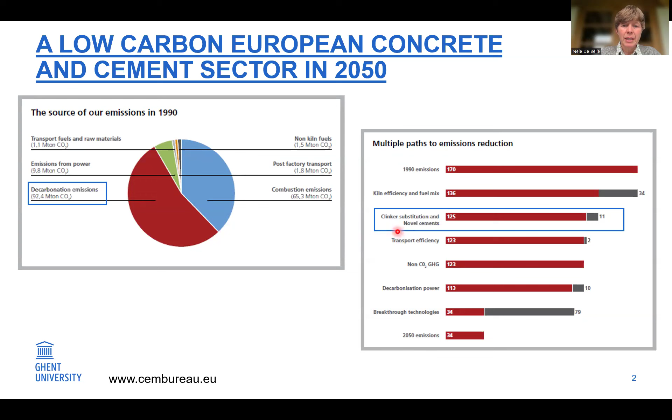In many regions worldwide, severe efforts are made to combat global warming. Since the production of cement contributes to around 8% of the global CO2 emissions, the concrete and cement sector have set goals to lower the carbon footprint.

Since the emissions are largely related to the decomposition of calcium carbonate in the clinker kilns, the use of supplementary cementitious materials to replace part of the Portland clinker can be an important part of the solution. The use of SCMs often contributes to pore refinement at later ages and can result in improved durability of concrete in several aggressive environments. However, in carbonation-prone environments, we have to consider that the carbonation rate is increased due to the reduced amount of Portlandite that could act as a buffer against CO2 penetration.

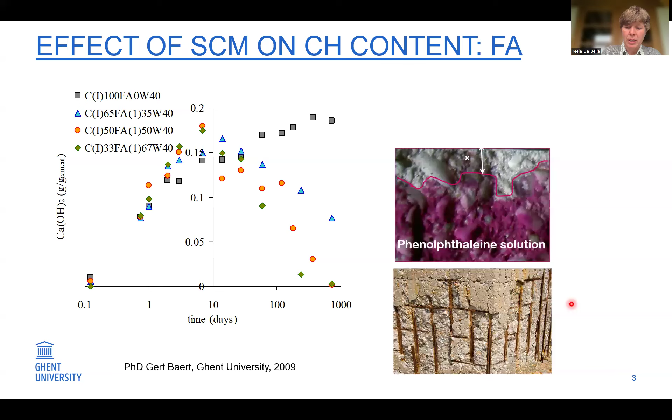In our previous research, we have shown that, for instance, in mixes with increasing amount of fly ash from 0 to 67% of the binder content, at early ages, there might be an increased amount of Portlandite production due to the stimulating effect on the clinker reaction. But after about 2 weeks, the pozzolanic reaction kicks in, and after more than a year, the Portlandite content can go down to 0. Hence, there can be an increased risk of reinforcement corrosion induced by carbonation.

Therefore, within the RILEM Technical Committee CCC, we have formed 6 working groups to study various aspects of carbonation of concrete with SCMs. The first 2 working groups have focused on the carbonation mechanisms, and the first thing we did was to compile an extensive literature review, elucidating the effect of SCM characteristics, exposure environments, and curing conditions on carbonation.

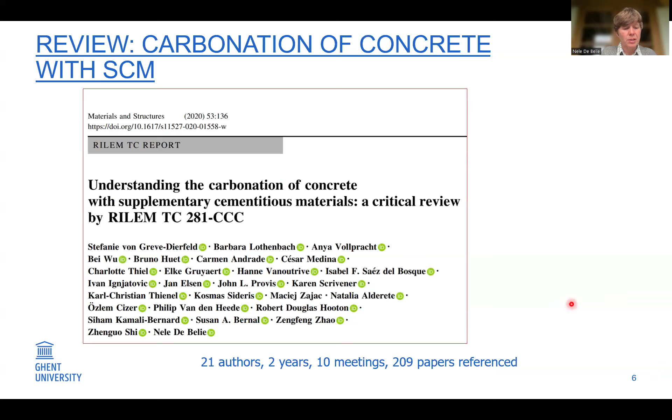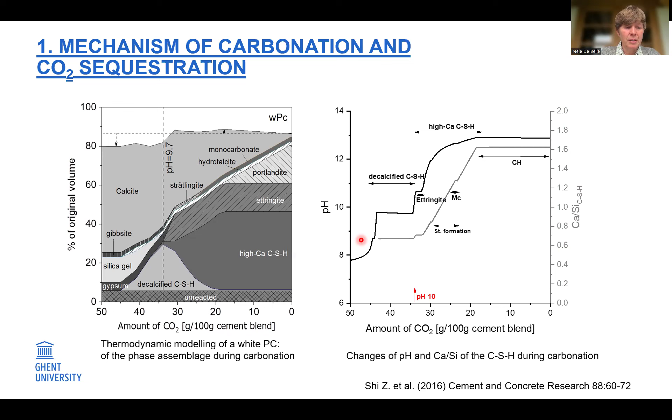The same carbonation sequence is observed in Portland cements blended with different types of SCMs. However, with the reduced content of Portlandite, carbonation more rapidly affects the CSH and the C-A-S-H phases, and this contributes to a coarsening of the pore structure, whereas in normal Portland cement paste, rather a pore consolidation of smaller pore structure is created. We can also see that in reality, the Portlandite carbonation may be incomplete due to covering by calcium carbonate crystals, slowing down the further carbonation reactions.

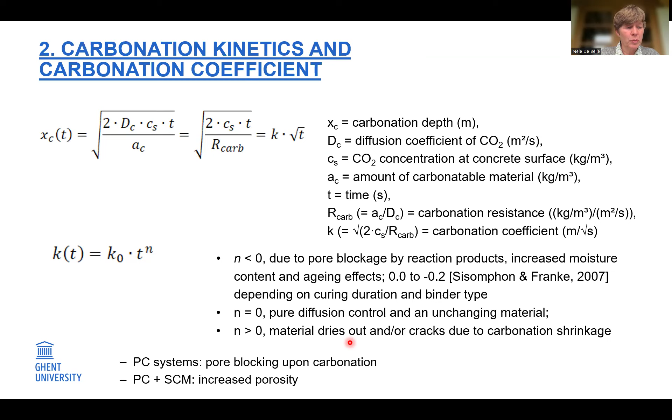Now, as the carbonation reaction proceeds with the square root of time, the first equation here assumes a steady state condition. However, if carbonation reaction products block the pores, and because of continuing hydration, the carbonation coefficient K could actually decrease with time. In the second equation, you would have a negative exponent N. On the other hand, N could be positive when the material is drying out or it cracks due to carbonation shrinkage, and that is often what we see in the case of concrete with supplementary cementitious materials.

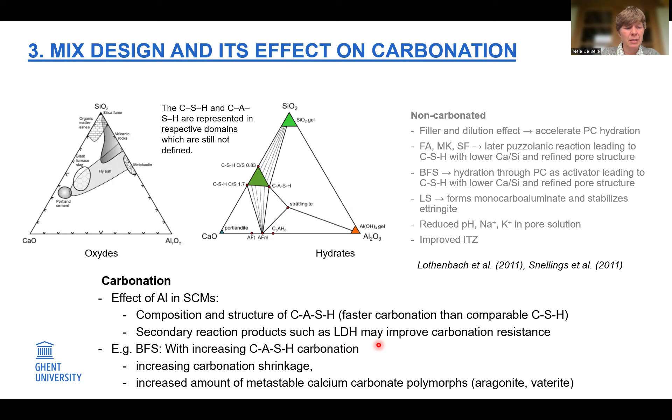Also, we see that the percentage of the calcium carbonate that is present as calcite is reduced, while we have an increased amount of the metastable aragonite and vaterite, and this might lead to a higher permeability. But on the other hand, there could be secondary reaction products, such as layer double hydroxides, which may improve carbonation resistance. But their effect is not yet fully understood.

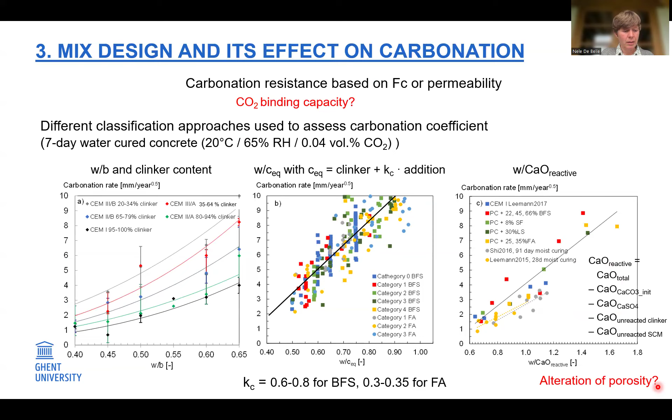Some other important factors: curing is of course very important to limit carbonation. We also know that carbonation proceeds fastest at intermediate relative humidity levels, but it's not very clear if the range is the same for concrete with SCMs as for ordinary Portland cement concrete. And higher temperatures generally accelerate carbonation as the chemical reactions and diffusion occur faster.

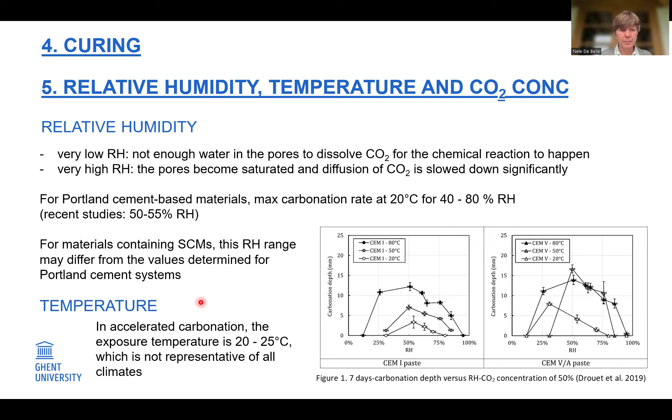What about CO2 concentration? Increasing this concentration is a common approach to accelerate carbonation for testing. From a thermodynamic viewpoint, it should not change the phase formation at all, but there are various side effects, as mentioned here.

For instance, more than 10% CO2 would lead to an incomplete reaction of the Portlandite due to fast calcite precipitation at the surface. Also, CSH carbonation rate increases with CO2 concentration, so there would be more calcium carbonate formed from CSH versus Portlandite.

So you have a change in proportions, and also the polymorphs found may be different at higher CO2 concentrations. Also, at higher CO2 levels, the release of water during the carbonation reaction will go faster.

This water in the pores can slow down further carbonation. So normally the increase in carbonation coefficient with the carbon dioxide level is lower than expected from the square root law that we would normally theoretically apply.

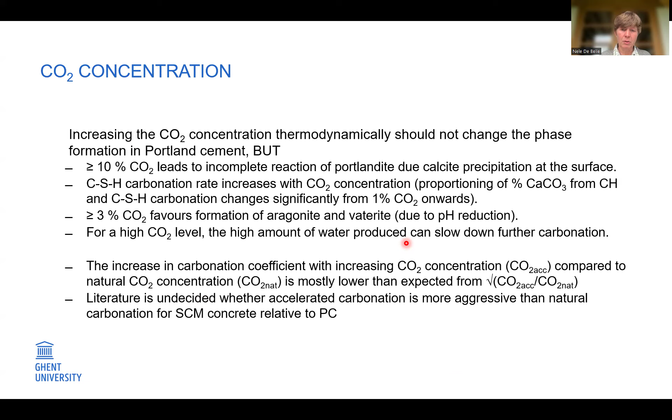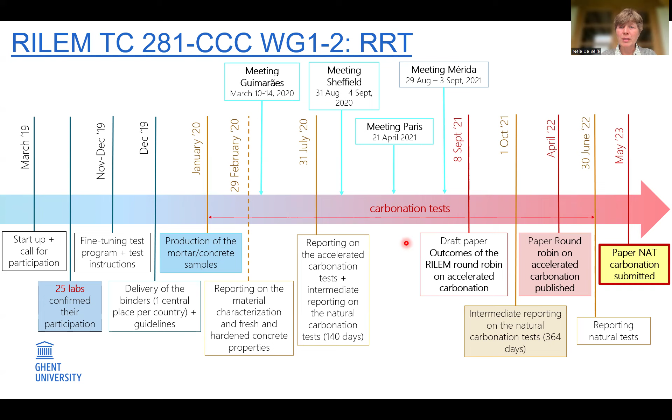So to obtain further insights into all these processes of carbonation of concrete with SCMs, we have conducted an extensive interlab test, which took us about 4 years, with 25 participating laboratories.

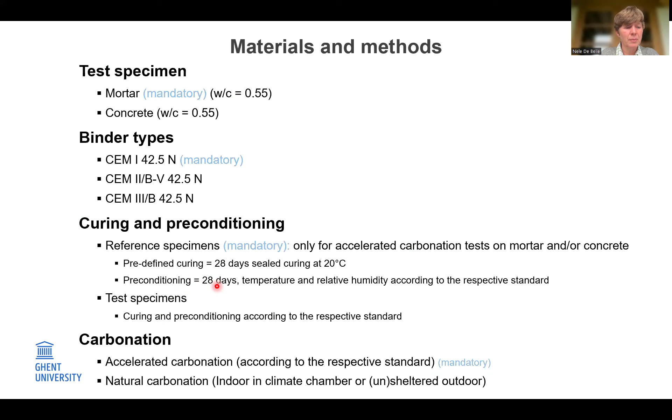We compared carbonation of mortar and concrete with the 3 common cement types, CEM1, CEM2, CEM3, both in accelerated and natural carbonation conditions. The specimens were either sealed cured for 28 days and then preconditioned in the same conditions as in the selected standard, or completely tested according to one of the selected standards. We compared 9 different standards, as you can see in this table, with specific curing, preconditioning, and carbonation exposure conditions.

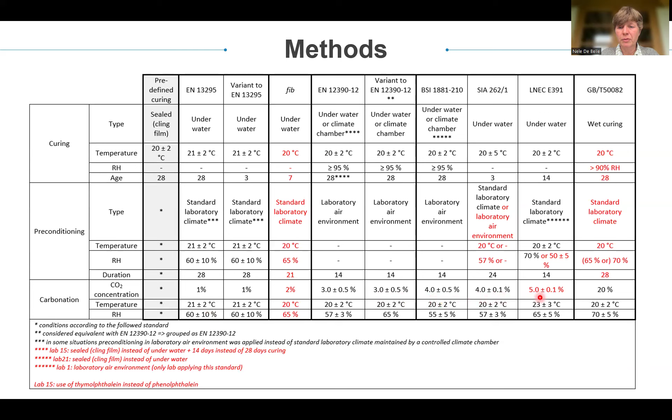For instance, for the percentage of carbon dioxide, it varies between 1%, 2, 3, 4, 5%, up to 20%. The mix design and curing conditions were such that the mortars or concrete samples were all of similar strength and consistency, independent of the cement type.

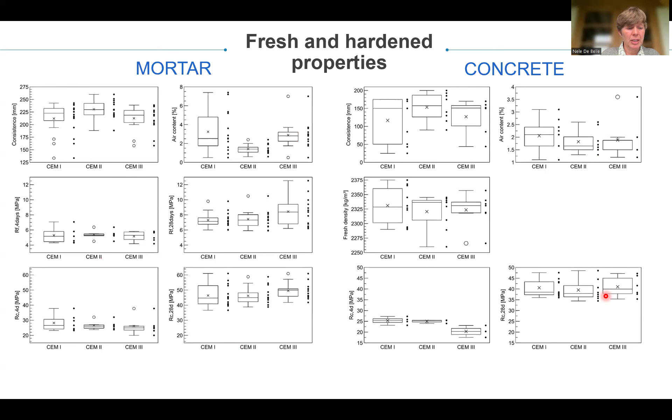The results showed, fortunately, that the different standards for accelerated carbonation were mostly able to rank the 3 cement types in the same order: the slowest carbonation for CEM1, followed by CEM2, and then CEM3 had the highest carbonation rate.

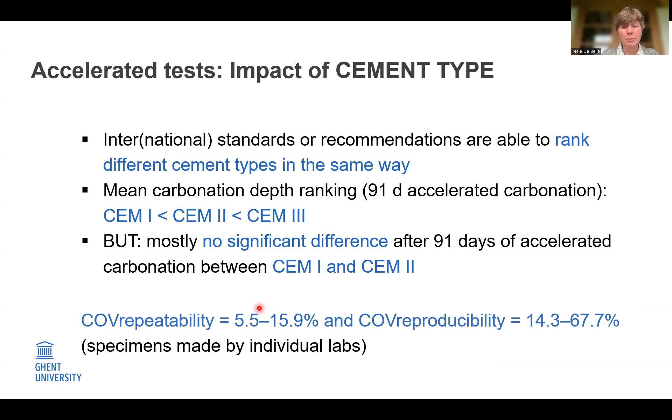Nevertheless, the coefficients of variation for repeatability and reproducibility, in labs and between labs, were quite high.

We also tested under natural carbonation conditions, and we obtained more or less the same order for carbonation of the different cement types, both for indoor and sheltered outdoor conditions, and both for mortar and concrete. When we looked at calculation of carbonation rates, it seemed essential for natural conditions that the exposure period was at least 1 year to reach a constant carbonation rate.

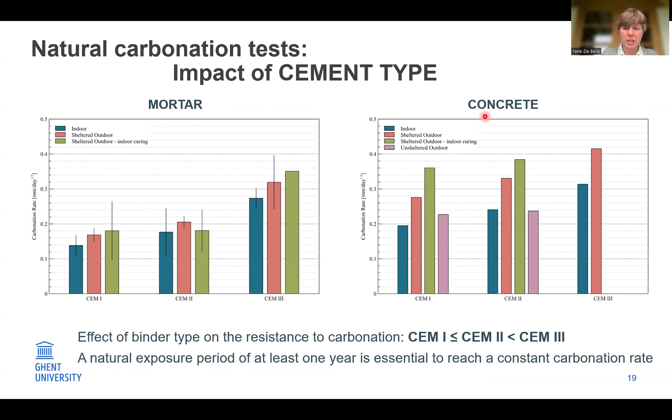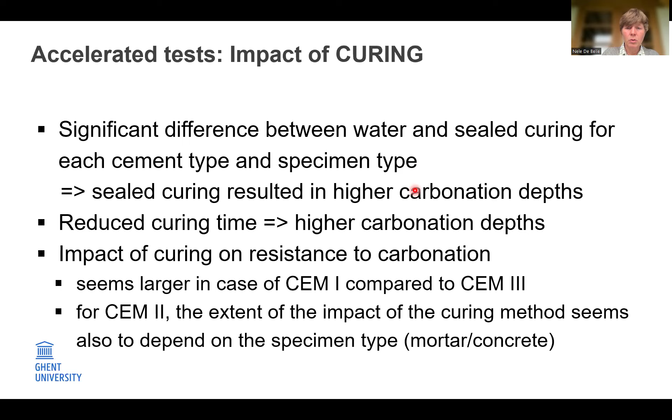Regarding the impact of curing, we found a significant difference between water and sealed curing, with sealed curing resulting in higher carbonation depths, and as expected, a reduced curing time resulted in higher carbonation depths. Unexpectedly, the impact of curing on resistance to carbonation seemed larger in the case of CEM1 compared to CEM3.

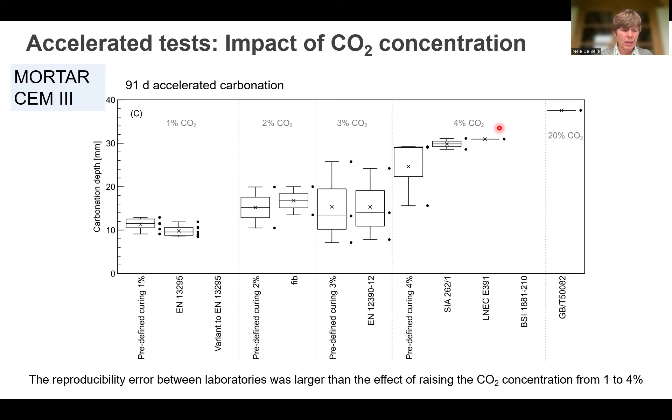In these results of accelerated testing, you can see a trend that the carbonation depth increases with increasing carbon dioxide concentration. But actually, the reproducibility error between the labs was so large that this effect was not significant.

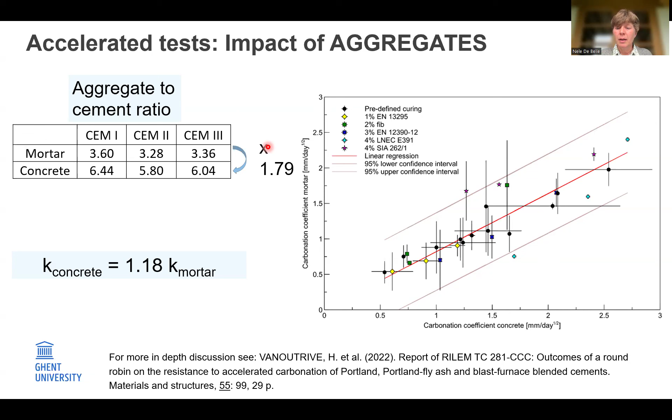We have also compared the carbonation rate of mortar and concrete. The carbonation coefficient of concrete was 1.18 times that of mortar, with the aggregate-to-cement factor being about 1.8 times higher for concrete than for mortar. In a natural carbonation test, the same factor was obtained.

We then also tried to correlate accelerated with natural carbonation conditions. Theoretically, if you look at the square root of concentration relationship with natural carbonation CO2 values of 0.04%, and for accelerated carbonation, for instance, 1%, we would obtain a conversion factor of 0.2. And for 3% in accelerated conditions, it would be 0.11.

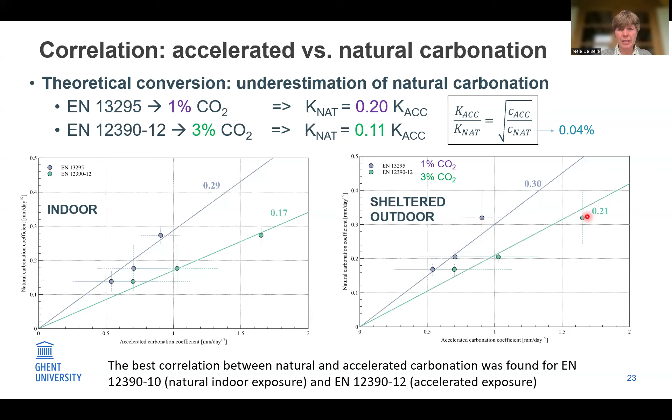However, in reality, for instance here in sheltered outdoor conditions, you see that the actual coefficients were quite a bit higher. This means that the theoretical relation would lead to an underestimation of the real natural carbonation rate if you start from accelerated tests.

Apart from our own round-robin test, we also established an extensive database of more than 1,000 mixtures with carbonation results from literature, including commercial binders with Portland cement and different SCMs, and also different binary and ternary blends with SCMs. We registered a range of different variables like chemical composition, setting times, activity indices, and so on.

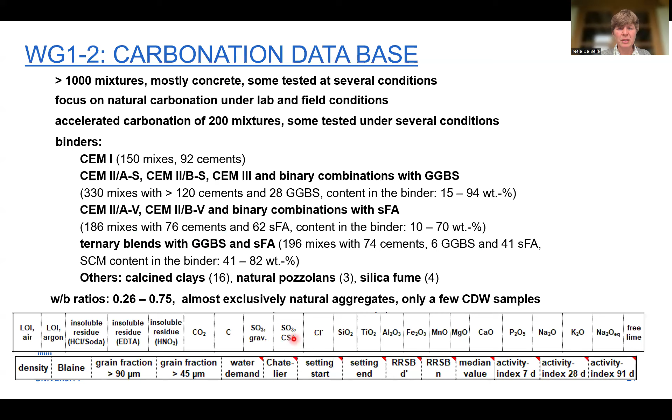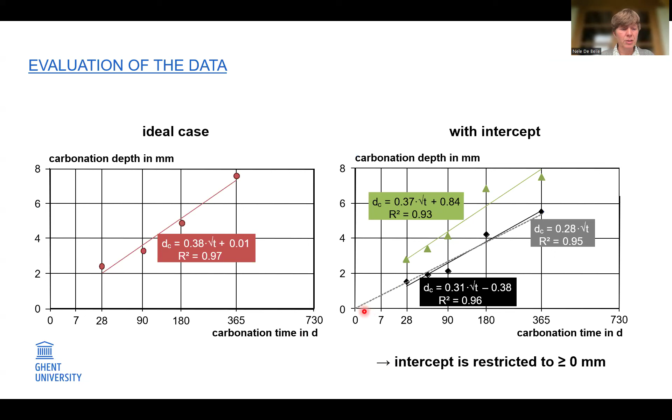For the evaluation of the data, we calculated carbonation rates based on the provided data points. If the obtained regression had a negative intercept, this was set to 0, since that is physically not possible. The effects of binder composition, mix design, curing, preconditioning, and relative humidity on the carbonation rate were all evaluated, along with possible correlations between compressive strength and carbonation resistance.

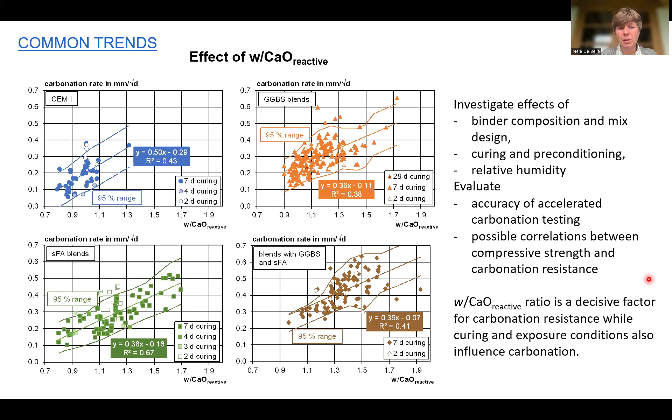We found that the water over reactive calcium oxide ratio is a decisive factor for carbonation resistance, and that was the case for different types of binders. It was also seen that concrete with higher compressive strength tended to exhibit higher carbonation resistance, so including this factor in a model might help estimate carbonation rates better.

Therefore, strength was also included in a probabilistic model, and you can see here all the different parameters that were included, with the different coefficients calculated using this model. For instance, it was seen that the reactive calcium oxide needs an exponent F, and this exponent F is considerably less than 1, as you can notice here.

The relation between accelerated and natural carbonation is seen here in the exponent D for the CO2 concentration. That is also less than 0.5, and 0.5 would represent square root behavior. However, for time T, the exponent E is very close to 0.5, so there the square root relation is quite well followed.

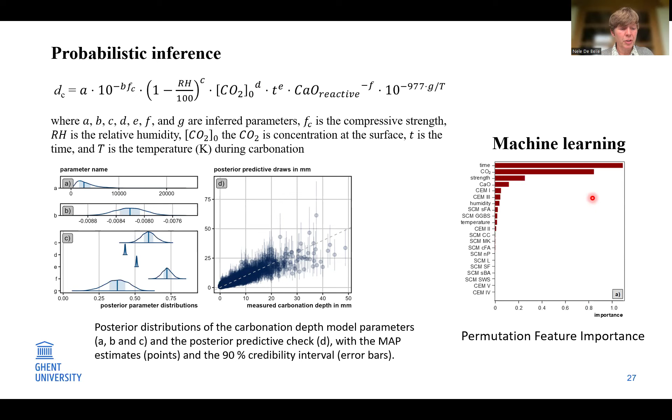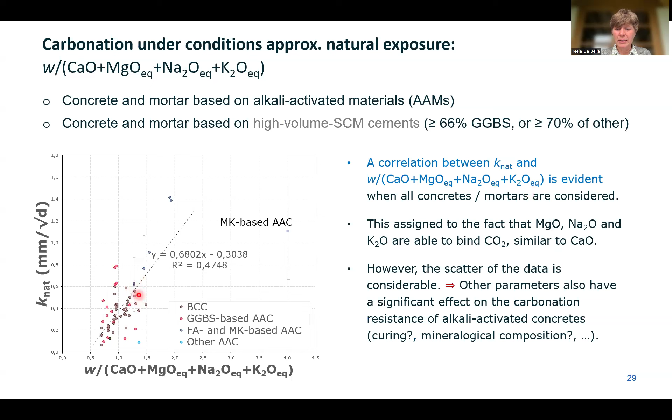Carbonation data were also analyzed in a database specifically for alkali-activated cements by working group 6. The analysis indicated that a better indicator of carbonation resistance would be the ratio of water over calcium oxide plus equivalent magnesium oxide, sodium oxide, and potassium oxide amounts, because these are also able to bind CO2 similar to calcium oxide. However, the scatter of the data was quite significant.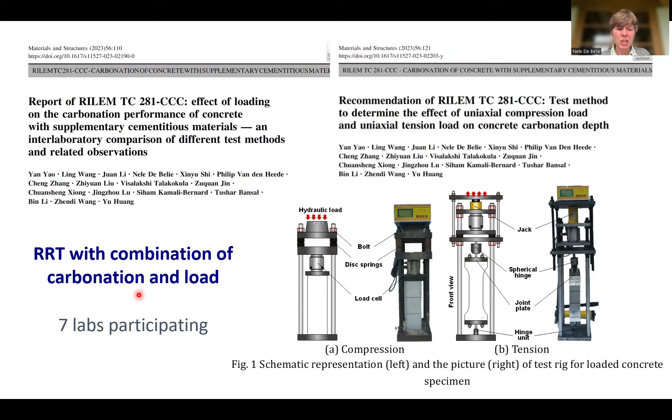Working group 4 carried out an additional interlab test to study the combined action of carbonation and mechanical loading, and made a recommendation that can be consulted in Materials and Structures. The results indicated that carbonation depth is lower in the case of a limited compressive load, like 30% of the failure load, and that is actually because of pore compression.

Whereas if the load is increased to 60% of the failure load, there is an increase of carbonation rate because some damage and micro cracks start to occur. This effect is similar, independent of the presence of blast furnace slag or fly ash in comparison to Portland cement mixes.

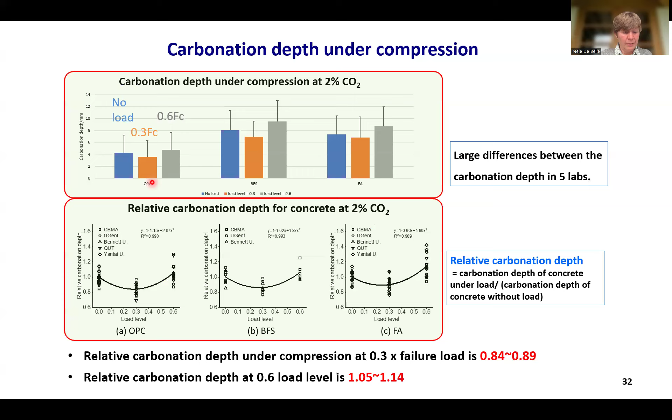If we consider tensile loading, the carbonation depth increases by a factor of 1.5 to 1.8 as the load level increases to 60% of the failure load. This is again the same for different SCMs and also for different percentages of CO2. This makes clear that it is very important that the loading conditions in a real structure are considered if you want to make an accurate estimation of the carbonation progress.

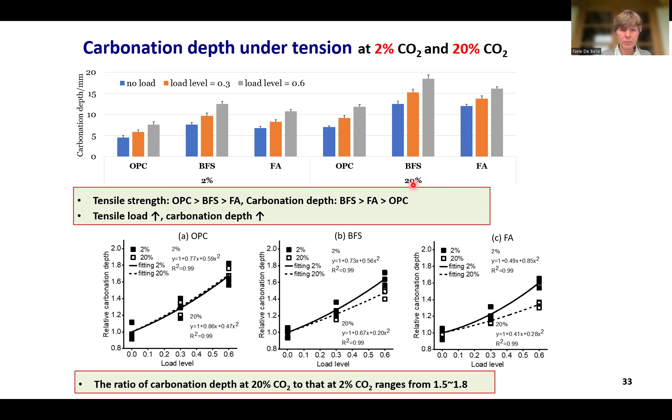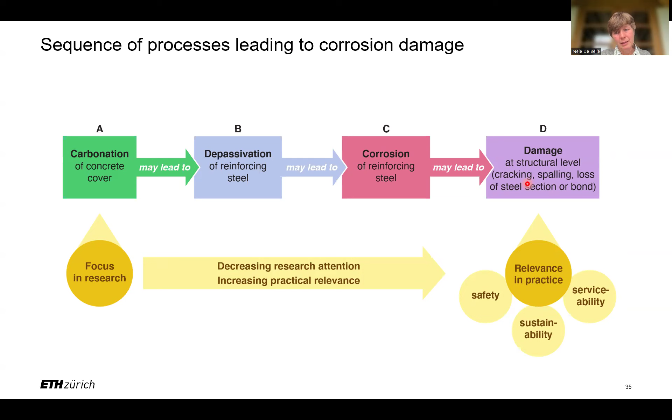Finally, working group 5 made a critical review of the effect of carbonation on reinforcing steel corrosion. Whereas carbonation itself has been a research focus already in a lot of projects, the possible results of carbonation, like corrosion and actual damage at the structural level, have received little research attention up to now, even though these have more relevance in practice.

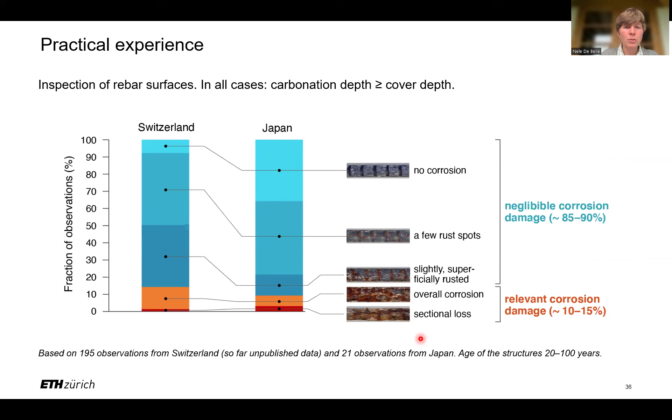From observations of more than 200 cases in Switzerland and Japan, it seemed that in only 10 to 15% of the cases where carbonation depth exceeded the cover depth was there actually relevant damage. So this means that maybe it's more important to look really at the damage and not only at carbonation itself.

This can be understood because we know that carbonation proceeds fastest at these intermediate relative humidity levels, whereas in these cases the corrosion rate would be rather low. It's only at high relative humidity or in contact with liquid water that severe corrosion damage is expected.

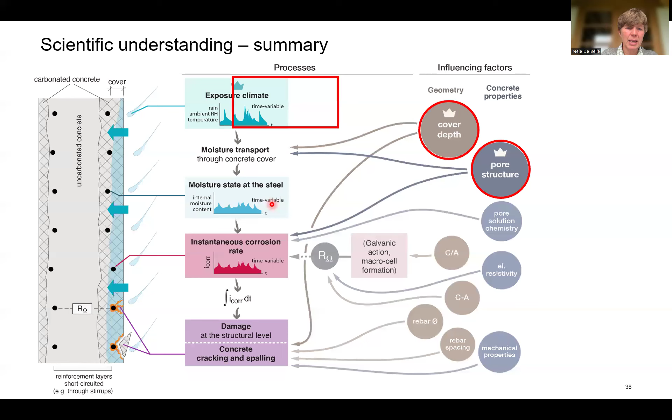So apart from the effect of the exposure climate, the cover depth and the pore structure are important influencing factors that affect the moisture state at the steel surface and hence also the corrosion rate.

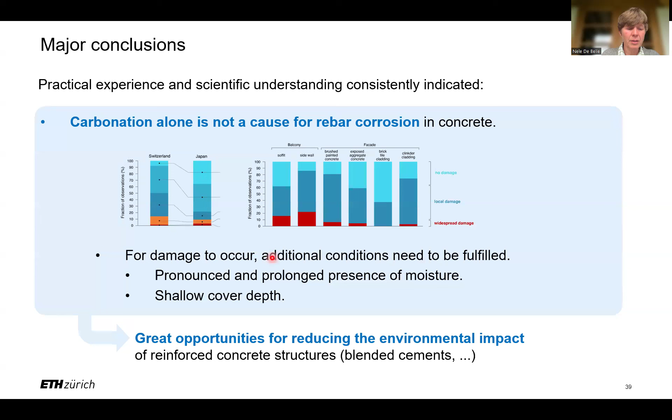We have to conclude that the fact that reduced pH alone is not sufficient to lead to significant steel corrosion suggests that the focus should shift from studying carbonation to actually studying corrosion of the steel in carbonated concrete. That should then allow us to conclude if faster carbonation of concrete with supplementary cementitious materials would also mean a higher risk of damage in concrete structures.

With this, I want to conclude, and I want to thank all members of the TC281 CCC for the very fruitful collaboration. This collaboration has also resulted in a topical collection in Materials and Structures and a review paper in RILEM Technical Letters, so if you want more information, it can be found there. Thank you for listening.